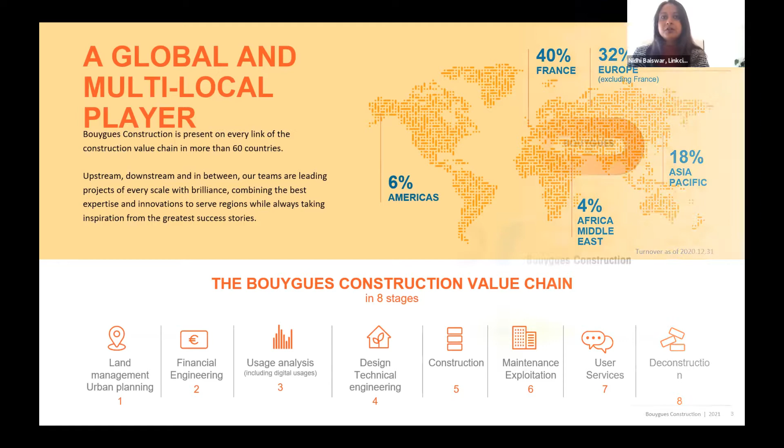So you would see a different range of brands that operate in the UK, and they're all under the Bouygues Construction umbrella. The part I will be talking towards the end of my presentation - I have one slide talking about how we worked with the University of Essex, and Link City is our developer arm who was closely involved with that development.

Now, I work with Link City. What Link City would do is find an opportunity to develop and build, then identify the best use for it and construct. Part of the offer would be constructing it and maintaining it. So Link City is a developer arm - we look after the life cycle of the project. Within Link City, we've got our student accommodation brand, called ULiving, and we work in partnership with universities to build student accommodation projects. It's as simple as that.

Now, there are two developments within the campus at University of Essex. One is called the Meadows and the other one called the Copse. Both were developed by ULiving and built by Bouygues Construction, and are being maintained through the same type of contract as you can see on the screen. I'll touch on that towards the end of the presentation.

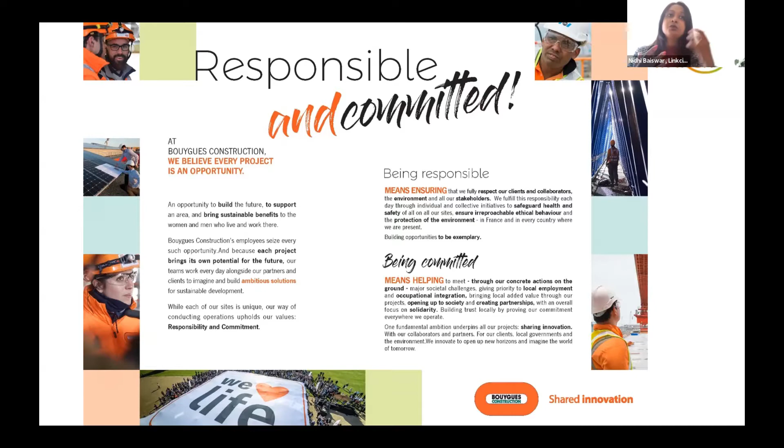So when it was launched, the Sustainable Development Goals were launched in 2015. This is our policy that came out soon after that in 2016, which is called Responsible and Committed. So we had a sustainability policy that existed before. With the UN goals, we obviously changed it to suit those targets and goals and came up with this policy, which now looks at 12 commitments. As our business covers the remit of a project, of a building, right from conception stage towards till the end, and even after the building is deconstructed, we formulated 12 solid commitments that we have got to deliver when it comes to our projects. So this policy sits as a base for all the work that we do within the company. So that's giving you a background of how our company adopted those goals and set something which we now apply on every project going forwards.

Then now going forward, what I'm going to talk in the presentation is give you an overview of the regulations and standards that apply globally. Of course, we've seen the UN goals, but now focusing more on the UK side of things. As you may know or may not know, there were some acts and regulations that existed in the past that asked every industry in the UK to reduce their global greenhouse gas emissions. So that came from a Climate Change Act in 2008. And then later on in 2015 with the Paris Agreement, obviously there were stricter goals set for us.

Recent years, you've seen a lot of activity in the media with Greta Thunberg, with David Attenborough, everyone talking about how there is a big need for us to now reduce our emissions and make our planet survive with what we've got. And following that...

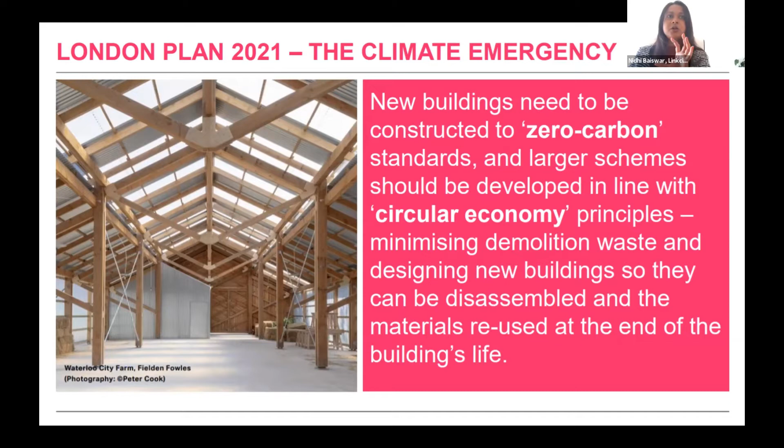I'll go into more detail later in my slides, but this is just to let you know things are changing, and changing dramatically. This only implies that once London has set something, other cities, local authorities, boroughs and councils - I'm already aware of them making these changes in line with what London has set. So very soon, all of the UK will have something similar to what London has got.

Now, some councils or boroughs in London have got a carbon tax, and they've identified the value of the carbon tax as well, which new buildings will have to pay if they are emitting carbon. So when constructing developments, we have to design a building which is zero carbon. And if it doesn't meet zero carbon, if it is emitting some carbon, then as a developer or contractor we would be liable to pay tax on the emissions the building would emit.

It's a big liability, and we have to consider that we have to pay tax for 30 years upfront, sometimes even before we start work on our sites. So it's a big, big commitment to ensure that what we are building is zero carbon at the end.

Now, those were all the regulatory requirements, or the main ones. I haven't covered everything because I could go on and on - there are lots and lots of regulations that apply to our construction industry, but those were the big main ones. In the next part of my presentation, I'll talk about the different challenges that we face.

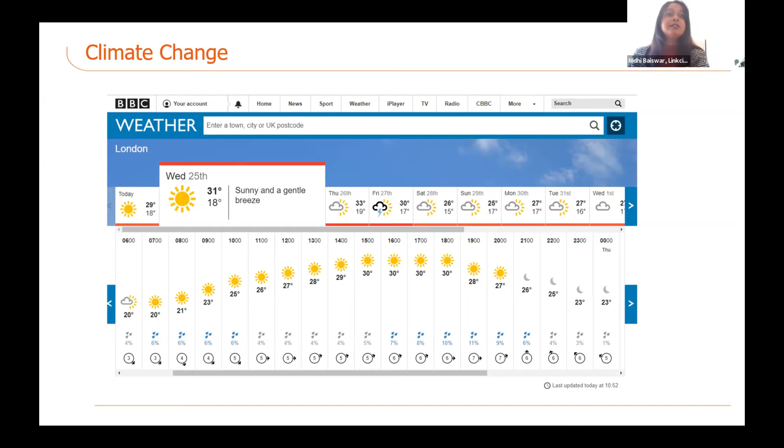So we all know things have been changing in terms of climate. There are different things we now need to be aware of, and all of this affects what we design today. If we're designing a building meant to withstand today's temperatures, we also need to consider temperatures that would change in 20 years or 50 years, and how users in the building will be comfortable now and also in 20 and 50 years' time. So we have to look at all those scenarios, model that for our buildings, and make sure these targets and changes in climate, temperatures, wind speed, rain, snow - all of that is accounted for when designing our buildings.

With that, another challenge which came up last year, which everyone's quite aware of, is COVID. This isn't to scare you - it's just to tell you that we've got COVID to deal with, and we think we've made a lot of effort. But all the efforts we've put in currently show only an 8% decline in worldwide carbon emissions, which means we have to continue this trend to meet the Paris Agreement of limiting the temperature increase to 1.5 degrees. So overall, there's very little we've actually done, though we think we've done a lot. We really need to do a lot more to deal with climate change.

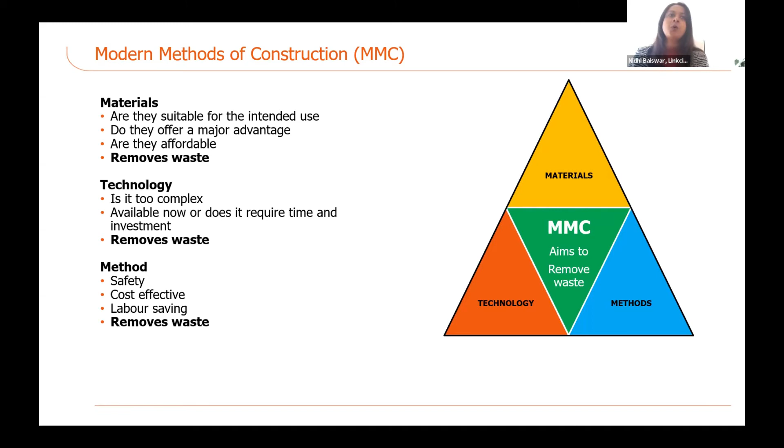With technology, we are investing in looking at what's the best way to use technology and make sure what we're producing is valuable for our clients, for our building users, and the method. So how we build it as well, whether it's safe to build, is it cost effective? Again, removing waste from the way we design, think, and use technology.

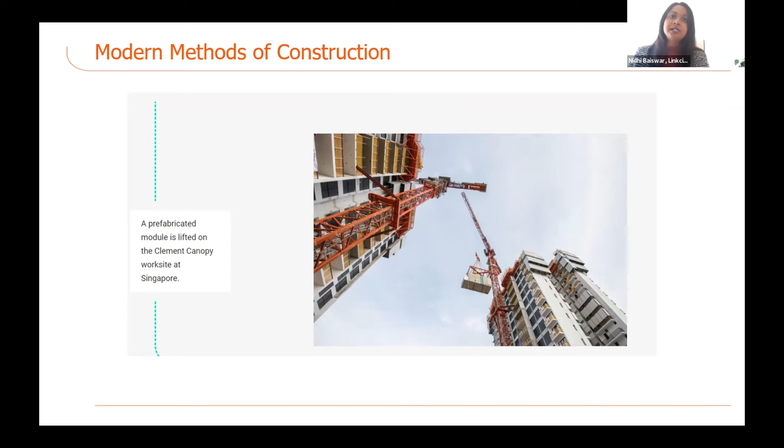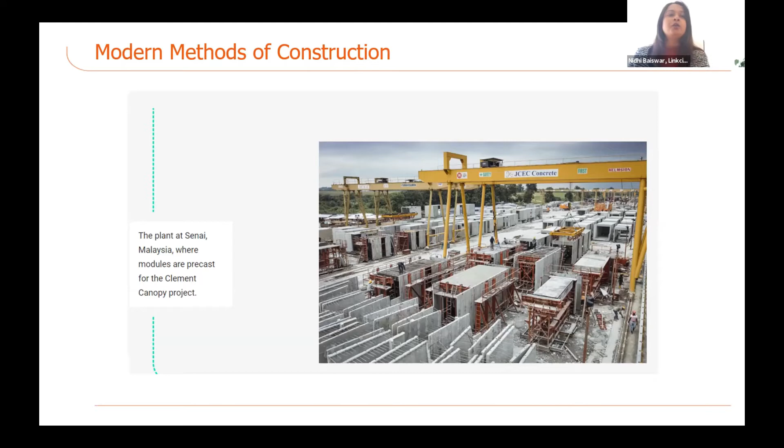Some of the examples, so what we've done is as a global company, we are looking at modular construction. So looking at how we can build some rooms in factories and then put them on the site, stack them one on top of the other, where what happens is when you're building, producing some modules in a factory, you reuse the waste that is produced rather than on site. So you're using the materials more efficiently, and on site, you're more efficient, you're quicker as well when you're delivering the building. So this is just a snapshot to show that we are looking into modular construction. That's one way of trying to reduce our resources consumption.

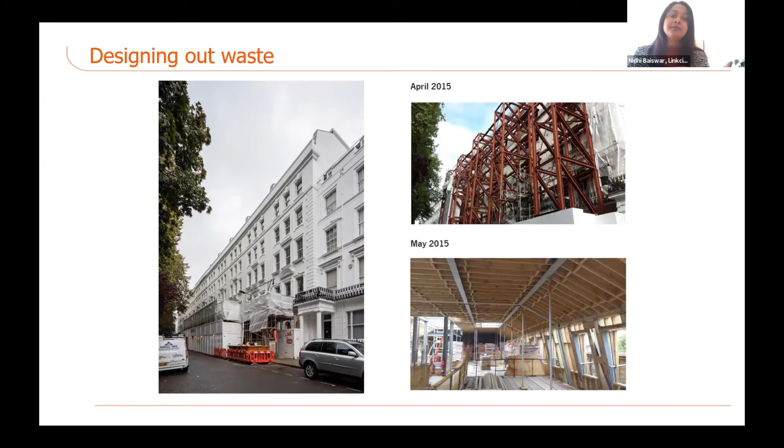One of the other ways is looking at refurbishment, like I said, of existing buildings. So this is one of the projects we did where we retained the facade of the building and completely refurbished inside or refitted the inside of the building to change the use as well. It used to be offices before, and now we've changed it to residential flats.

Also looking at recycling and remanufacturing. So things that come out or materials that come out of our demolition waste, how can we use it back into the structure of the building? Wood, how we can best recycle wood, and any furniture or loose items that come out as well. How can we look at refurbishing them and putting them back into the building?

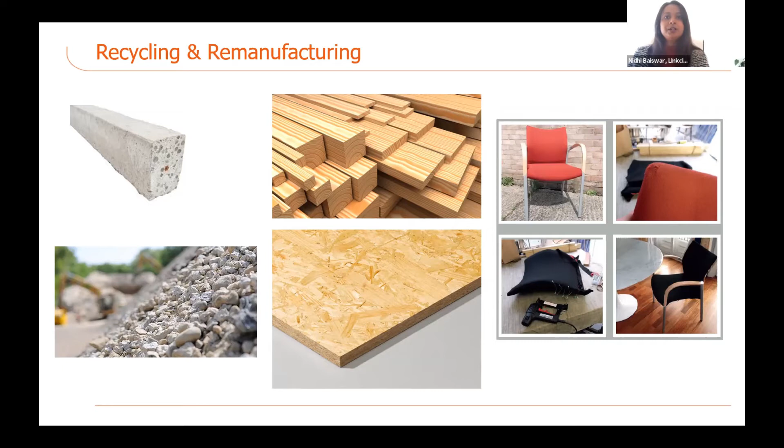And also working with some suppliers who offer this service where we pay them a rent and they come and give us the furniture. And after every couple of weeks or a period of time, they come back to replace the furniture or mend the furniture if it needs replacing. So we are paying for the service, not for the product. And that keeps the materials in the loop. So we're looking at a lot of models relating to that sort of economy.

And the next part, so we're looking at how we can use nature as the best model to design our buildings. So one example of that on the screen, as you can see, you've got cross sections of different solid materials. So the first one is a solid square, but in the form of a tube. So the structural strength of that element that you see with 100% of the material is the same as that other side of things where you have a circular solid section.

Which uses 82% of the material. So you've saved 18% of the materials, and you're getting the same strength at the end. And then the next part, you can see the hollow tube uses only 20% of what the first option was, yet it gives the same strength.

And in the last part, we've removed the materials from the top and the bottom, and put material only where it needs the exact strength. It uses just 14% of the materials compared to the first option, which was 100%, and gives you the exact same strength. So in engineering terms, materials have been removed, but it still gives you the required strength for your structure, if you design it correctly.

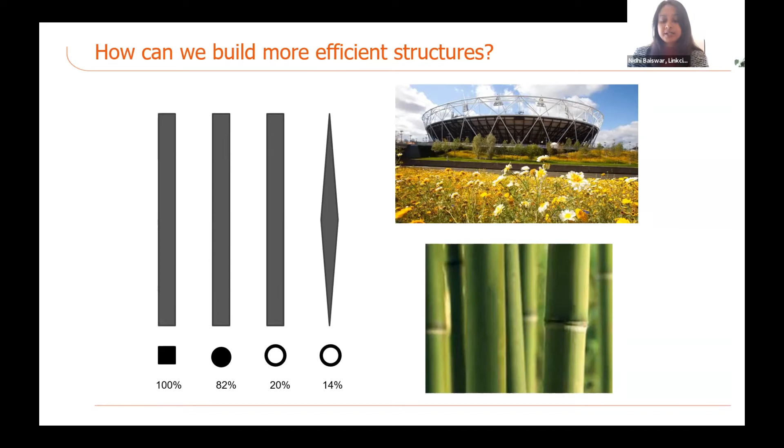What we're really focusing on is putting nature back into the developments we build, looking at how we can improve urban biodiversity and build communities that cater for the needs of every individual using the building, whether it's a young family, a student, an old couple, or a single person. We're looking at future-proofing our developments, so that a student living there can stay for their entire lifetime, and the buildings can adapt to changing uses.

To conclude, these are pictures you may be familiar with, the two student accommodation buildings on your campus. Both were designed and built by Bouygues, and I was part of the latest one, which is called the Copse.

We've applied those same principles I showed you in the previous slide. We've certified these buildings for BREEAM, looked at material efficiency, flood risk and adapting to climate change, and how we can improve ecology and biodiversity, energy efficiency, and a lot more. I could have put many more things on the slide, but this is just a snapshot.

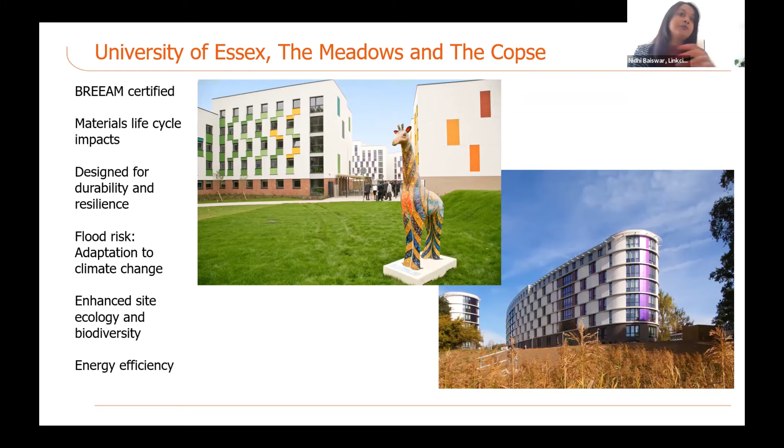We changed the way we worked ten years back, and now we're applying that on every project we deliver. We've been able to achieve this through our company culture, which is now called Shared Innovation.

On our company logo you'll see a tagline which says Shared Innovation. That's a big driver for these good sustainability stories we have to tell on our projects, because we encourage our people to come up with innovative ways of meeting sustainability and environmental targets and regulations, applying that on our projects as we go along. It's that collective intelligence that helps us deliver sustainability on all of our projects, and this motto of shared innovation is really the big driver.

So that's all from me. I hope you found it interesting and learned something, but I'll be open to a couple of questions for you, Nidhi, if you don't mind.

Yeah sure, me asking, three to be precise. One of them casual, just light-hearted, with regards to the accommodation I can actually see out of this window that you've helped out with. The second one I think will help me and the audience learn, and the third will be a challenging one, so do prepare.

So first, the light-hearted one: you mentioned at the beginning of your presentation that the way your company constructs a building, it's built to look forward, so if the building were to change its purpose, you adapt and think about what it could potentially turn into. As a side note, and a little Easter egg, are there any plans or possibilities for the accommodation that stands there? For example, has the university or your company foreseen a separate option that the Copse could evolve into?

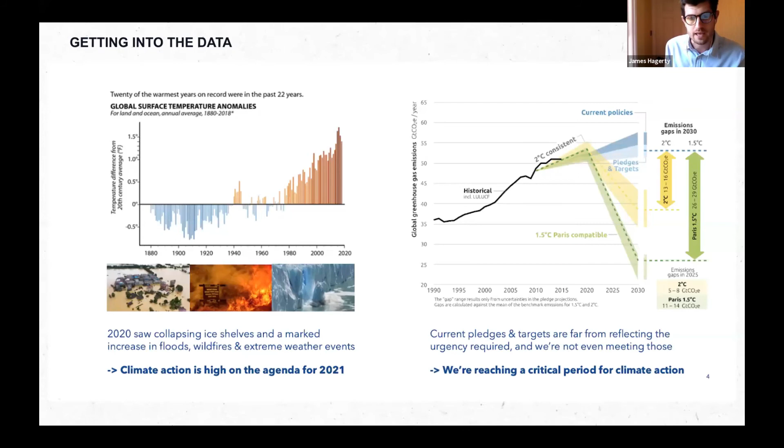So the first thing I just wanted to touch on is this massive misconception around how your carbon footprint is measured. Not sure, Nidhi, if this is the same in the construction industry, but carbon is calculated within food and drink based on the electricity required to produce that certain product.

So, for example, we source about 85% of our beans from South America. All of those beans are grown in shade-grown farms, which we're really proud about. Our farmers, or chain of farmers, put the beans in the back of their car, drive it to our facility. They then pack it onto boats, ship it over to the UK, and that's when the emissions side of it starts to get a bit interesting. So it goes from there to being stored in a warehouse and then sent out to the customer.

So part of that whole value chain, you have multiple points of different calculations. At the moment in South America, their spread of environmental energy production is far less developed than the UK's. So we produce a certain amount of green energy through different green initiatives, but the common misconception around this is that carbon footprint is just measured on the host country's electricity production, when in actual fact it's split across multiple countries. In the case of coffee, you have it being produced in Brazil, manufactured in Europe, and then shipped to the UK. So you have multiple different points of electricity consumption.

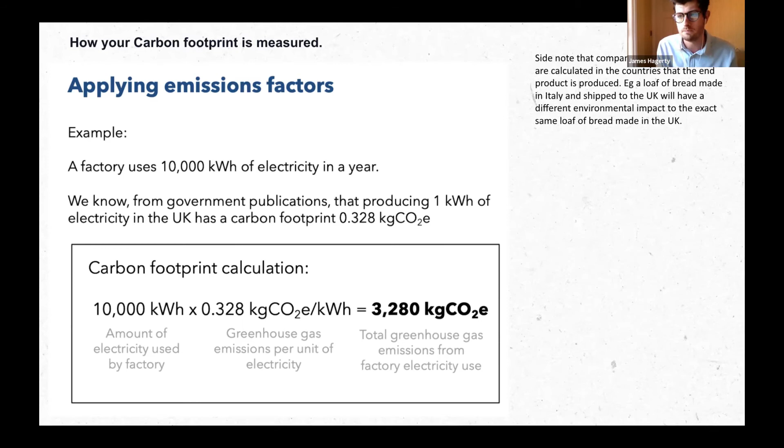So for us, 1 kilo of coffee produces about 16 and a half, 17 kilos of carbon, which I'll show you in a minute how that stacks up to some of our competitors.

So in our first year, which was 2019 to 2020, we sold 34,504 units of coffee. Predominantly that was sold through our website, with Amazon feeding in as a secondary source.

So 34,202 kilos worth of product was actually moved. Again, this is such a blurred line of what the company takes responsibility for. Do we take responsibility for shipping our packaging from Eastern Europe, for example, over to the UK? Where does the buck stop on that one? So it's still a little bit murky, those waters.

But yeah, 16.2 kilos per kilo of coffee sold, which for our first year was the equivalent of heating 200 homes, 2 million miles in a car, or producing 21 tons of beef. And amazingly, Presto's little business contributed to...

0.0002% of the UK's annual net emissions. And this is kind of why I started Presto, peering behind the mask of sustainability. Everyone within food and drink is on this rat race to improve their packaging from single use to recyclable or compostable, when in actual fact it only equates to 2% of the total emissions.

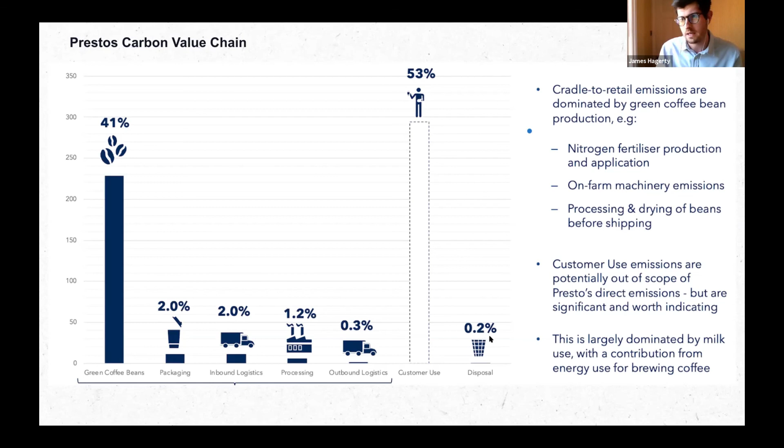And then around the disposal, so we did launch the brand with packaging that wasn't recyclable. So that did have, in our first year anyway, an impact on our carbon value chain. But seeing as we're recyclable now, this 0.2 is more like 0.0001 of our total chain, just because of the benefits of recyclable packaging. So looking at how we compare to some of the brands that you'll see in supermarkets...

Yeah, coffee is a really bad one, and it's just behind meat, but doesn't get the stigma that beef production gets, rightly or wrongly.

Interestingly, Quorn in 2019 started publicizing the amount of carbon on their packets, and advertising regulations soon put a stop to it, because it was more of a naming and shaming exercise for their meat alternatives. So it's something that brands are starting to look at more and more, and I just think it needs to be either adopted wholly as a category or rejected.

And then being a small business, how can we shout that we are reducing our impact to the best of our abilities, given our budgets? I don't know whether anyone's heard of B Corp, but it's a massive corporation with around 4,000 companies associated to it, and we've just submitted our application to be part of that, and that looks at how ethical we are from a sourcing perspective, how we treat our customers, how we treat our employees, how the business is formed, the governance aspect. Is there equality on the board?